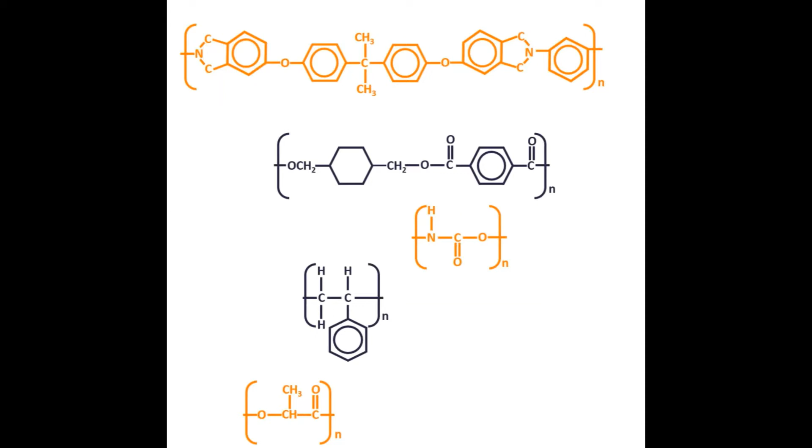The title of this lecture is Polymer Matrix Composites: More Than Just Strength Improvement. The reason I titled it this way is because we're going to look at other applications we would make composites for. And when most people think of composites, they think of strength improvement, and with good reason.

If we go back to the earliest use of composites, we need to ask ourselves: what is the first documented use of composites? If you look at the Bible, Exodus 5:7, the Pharaoh tells his people to no longer supply the Israelites with straw for making bricks. Let them go and gather their own straw. This was after Moses came in and said, let my people go. This was punishment on the Israelite slaves, imposed by the Pharaoh.

Now it's very interesting because they're talking about straw for making bricks, and the straw was actually used as a reinforcement. So no matter your religious belief, the Bible is still a written document, and it was written over 3,000 years ago. So over 3,000 years ago, people were making fiber reinforced composites.

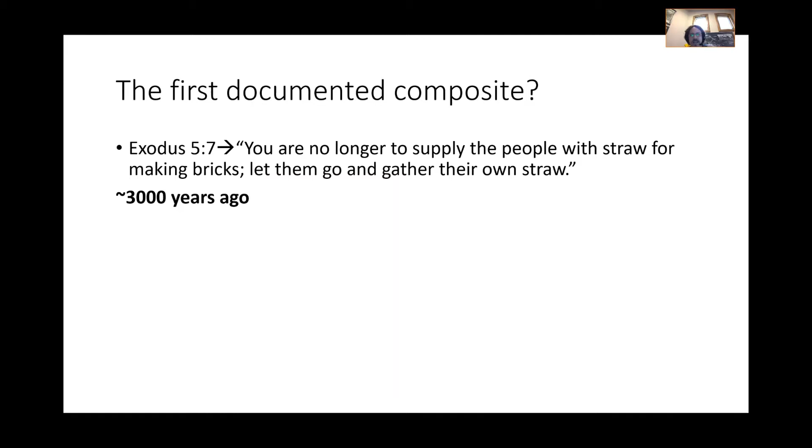You may think it's old technology, but if you look at this paper, people are still doing research on reinforcing bricks using straw as a fiber reinforcement. This paper was published in 2017, which isn't that long ago.

From the get-go, composites were made more as a strengthening type of application, and the earliest case is strengthening of bricks. You can go into other strengthening mechanisms for bricks. You always hear that the Greeks sun-baked their bricks and the Romans oven-baked their bricks, but that's more manipulating the matrix. Reinforcing with straw would be making a composite, where the matrix is clay.

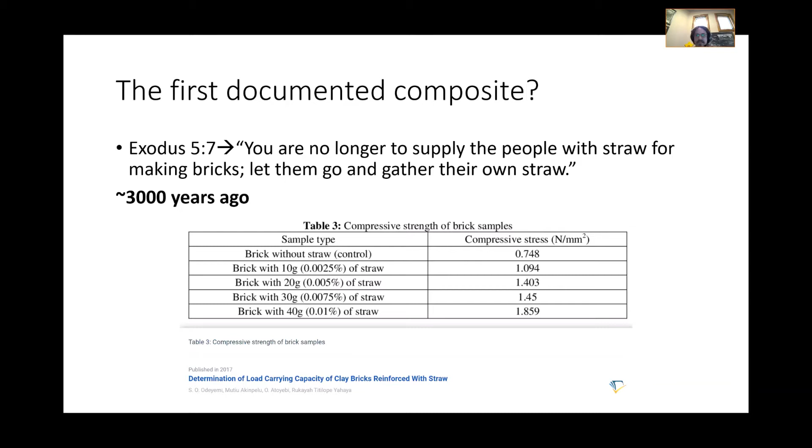If you look at straw reinforced bricks, it's pretty much the same thing as adobe. If you look at this building here, near my home, it's an adobe building with stucco on it, kind of a veneer, and it's flaked off so you can see the adobe bricks. Straw reinforced bricks is what we see in adobe.

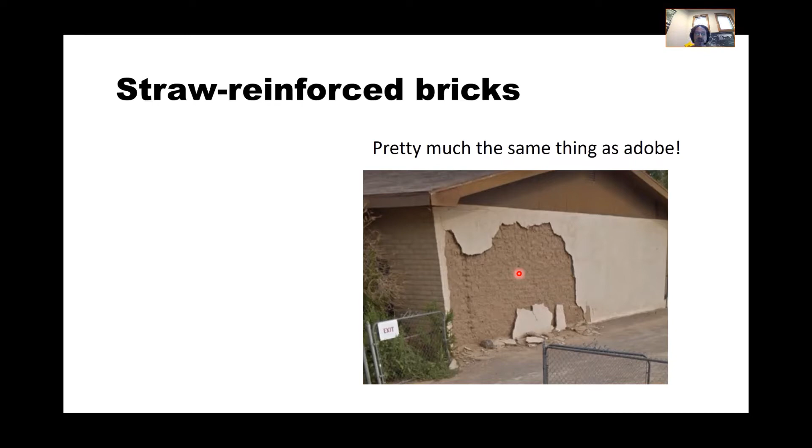Adobe's been used in the Southwest for centuries by the native, indigenous cultures. This is my hand, but I'm holding a brick my child made, having done an experiment making her own adobe bricks. If you look closely, you can see it's essentially a plant fiber reinforced ceramic matrix composite. What a mouthful.

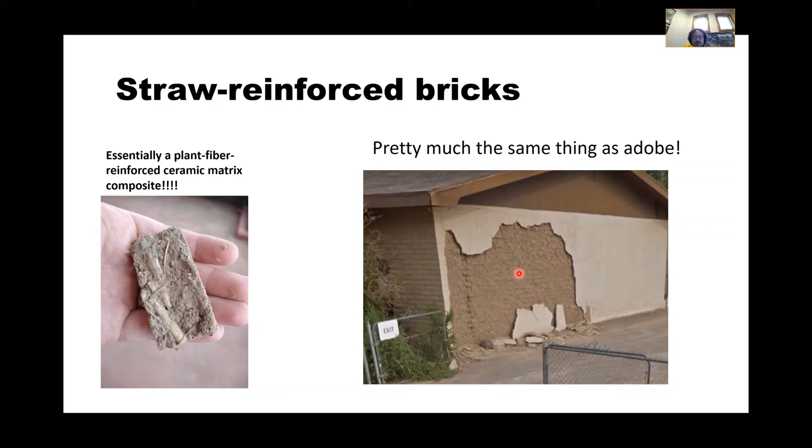That's kind of a segue into what we're going to be talking about today. We're going to talk a bit about plant fiber reinforced composites, research done here in MME, Metallurgical and Materials Engineering, in my lab, the Polymer Extrusion Lab. I titled the presentation 'More Than Just Strength,' and we'll get there, although the first few examples deal more with strength reinforcement. Hopefully this is a different point of view for you, and it enriches the viewpoint you all will have in terms of composites compared with laminate composites.

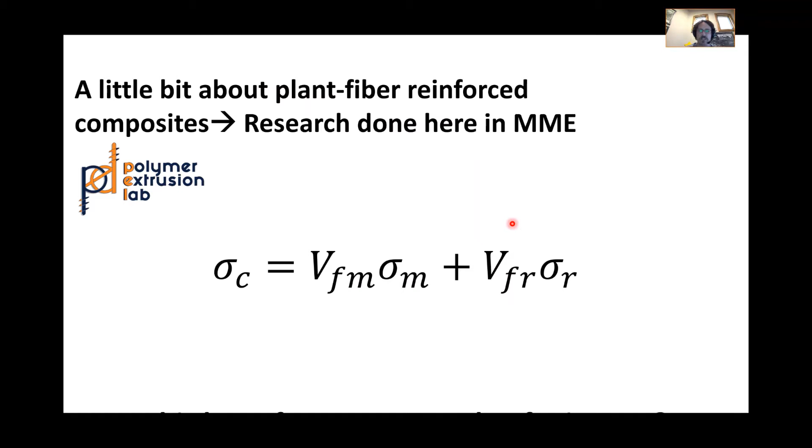A lot of the design for composites is geared around this simple equation: the yield strength of your composite equals the volume fraction of your matrix times the yield strength of your matrix, plus the volume fraction of your reinforcing agent times the yield strength of your reinforcing agent. Not too terribly hard of an equation. You want to think about whether it's a law of averages or a rule of mixtures — two equation types we talk about when we make a final product out of two or more constituents.

Additive manufacturing of composite materials — something I've been doing for a long time, and it's quite interesting.

If we take a look at this equation here, we're saying the yield strength — think of a tensile test where you're pulling, and you want those fibers to be oriented in the same direction as your applied stress.

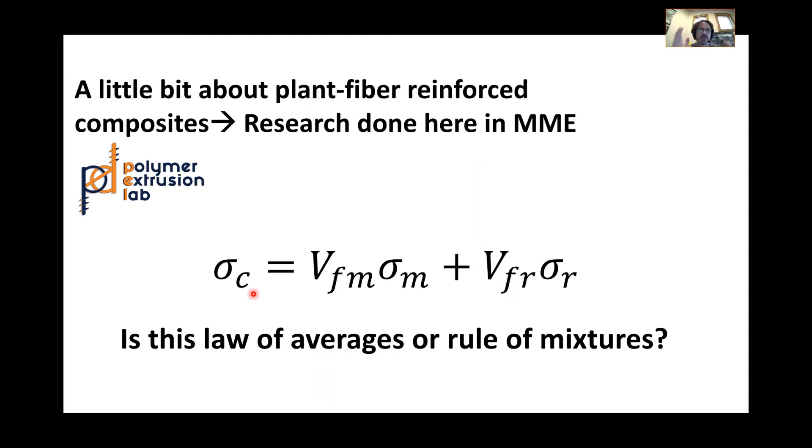What's actually kind of cool with additive manufacturing, and I'm talking about fused filament fabrication additive manufacturing, let me get this slide out of the way.

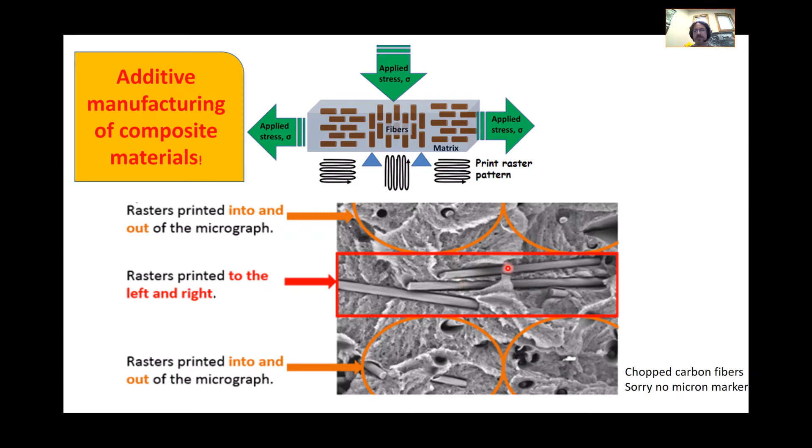The matrix material we're going to talk about first in some work - we're talking a little bit about plant fiber reinforced composites we did here. The first matrix material I'm going to talk about is polylactic acid, PLA. It's not the best material, but there are some advantages to using it.

It's sustainable, sourced from sugar sources - corn, mainly in the US, we grow a lot of corn. Beets and sugarcane are primarily used in Asian nations, where they grow a lot more of that kind of crop. It's biodegradable, so sustainable, which is a big deal. You don't use petroleum resources - it's sourced from renewable resources, and it's also biodegradable.

The drawback is it's not exactly an engineering plastic. So the primary application for PLA is actually food products. It is used in several biomaterial applications like stitches, and it also has shape memory properties, which makes it good for stitching. You can stitch a wound very loosely, apply some heat, and then it draws the edges of the wound together. It's kind of interesting.

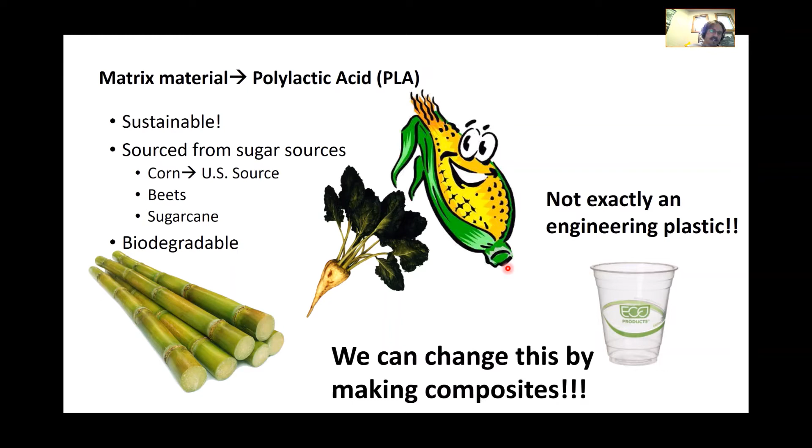But we can change the fact that it's not exactly an engineering plastic by making composites. The filler material we used at first was jute plant fiber - again, jute, a kind of renewable resource.

I'm going to pose this question to you: if I make a composite that is 2% by volume jute plant fiber and the balance PLA, what is the theoretical yield strength of this composite? Ask yourself this question - you might see something similar later.

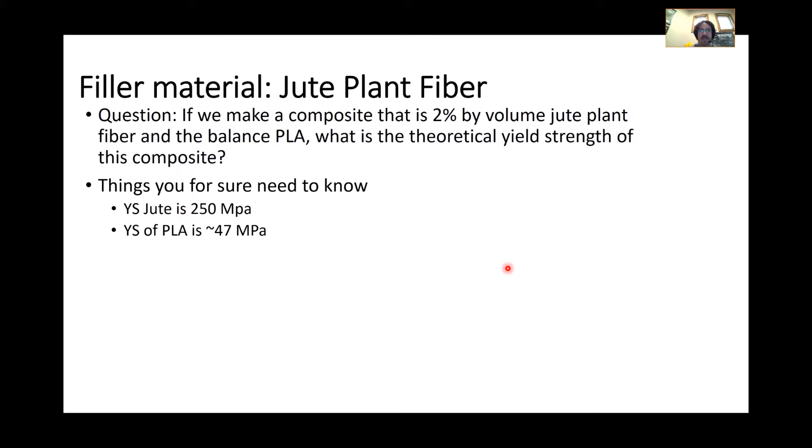Things you need to know: you for sure need to know the yield strength of jute, which is 250 megapascals - forgive my small a, I see that error a lot. And the yield strength of PLA is roughly 47 megapascals, depending on molecular weight and other things like that, but let's just go with 47. You will have to assume now that the interface between the matrix and the filler is robust.

And that's a big assumption, because if you recall the micrograph on chopped carbon fiber in the polymer matrix, you saw there was some pull out. Glass fiber reinforced composites were probably one of the first things society saw in terms of a polymer matrix composite, and the first thing that happened was the glass fibers pulled out. It was Owens Corning who developed some of these procedures to improve the fiber matrix interface.

So right now we're assuming the interface between the matrix and filler is robust. We're also going to assume that the fibers are oriented parallel to the direction of applied stress, and we're going to use this equation we saw before: the yield strength of our composite related to the volume fraction and yield strength of the matrix, and the volume fraction and yield strength of the reinforcement.

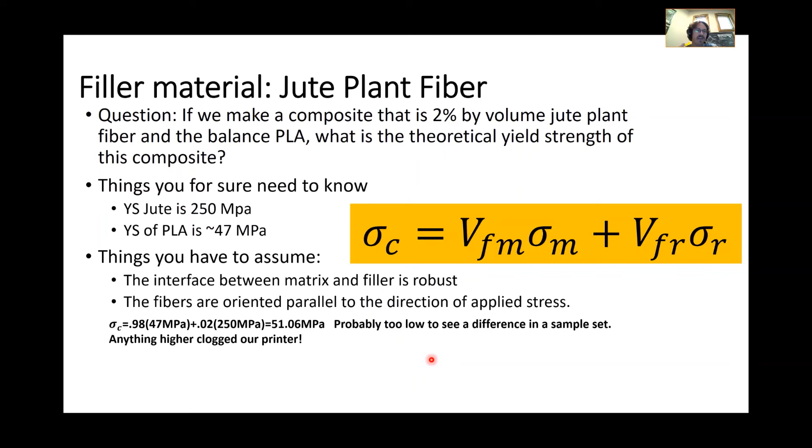Okay, so let's start talking about considerations we want to make when we're making composites. And one of them is the limitations imposed on your materials by the manufacturing process.

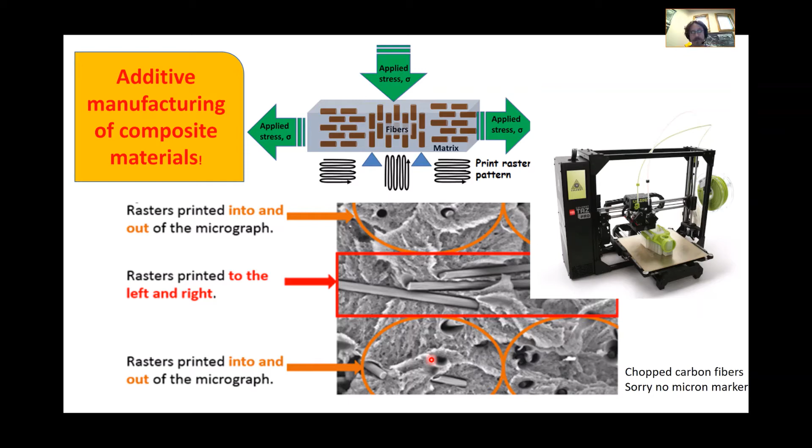I think a lot of people are familiar with FDM: you're squeezing molten plastic through a very small orifice, usually less than 1 millimeter in diameter, sometimes 0.1 millimeters. So if you have stuff that's going to clog it, you're going to have some troubles. That's one thing to consider, the manufacturing process.

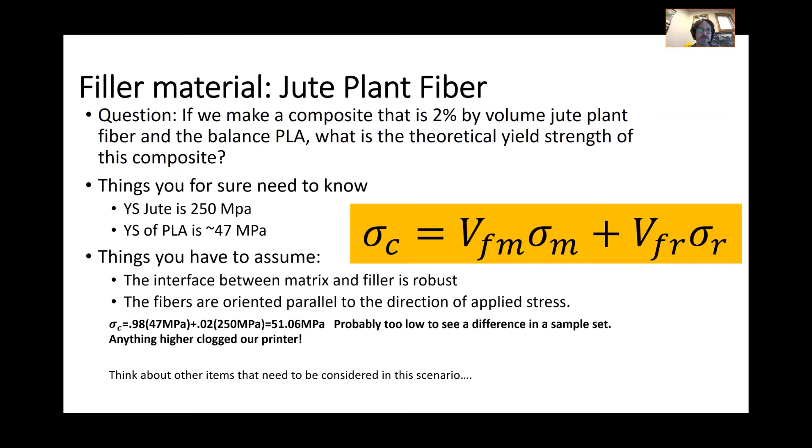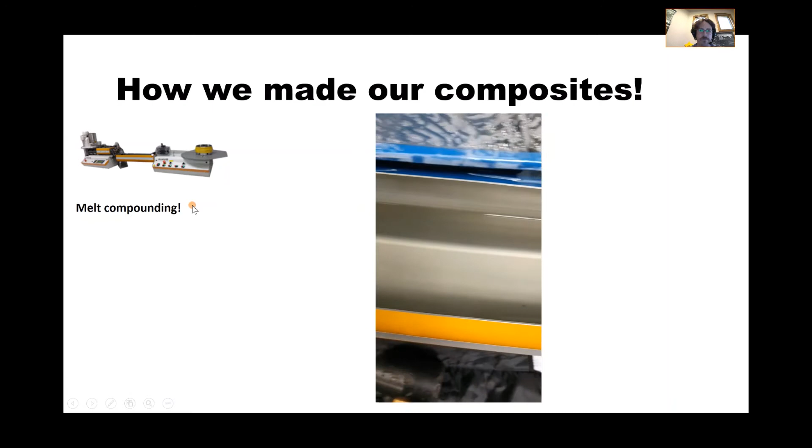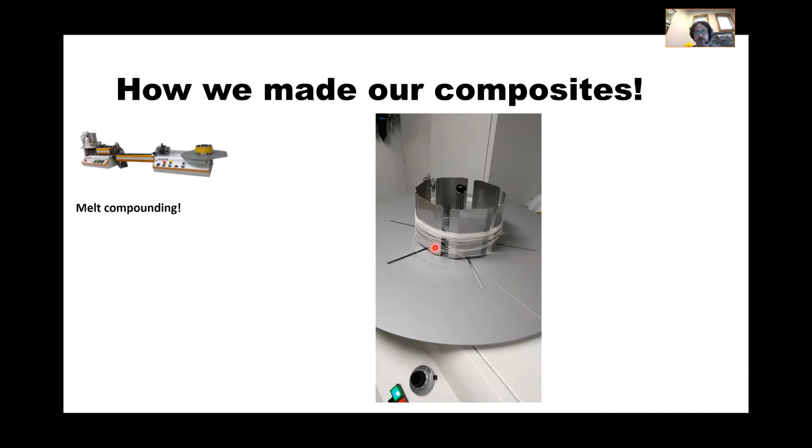You feed your material here, it goes through the extruder, we cool it off, and we wind it, so we have a filament that's ready for our 3D printer platform. We can go direct from melts to filament, and we can also chop it up later and make different types of material systems. You feed your material through a hopper, it melts, goes through some sort of cooling, sometimes water, sometimes air, sometimes both. This is called a belt puller to try to maintain the diameter, and we have other components too that help us with diameter control. Then we wind it. That's how we've made pretty much every composite in this talk, using this extruder or another.

Basically, we have other kinds of smaller types as well.

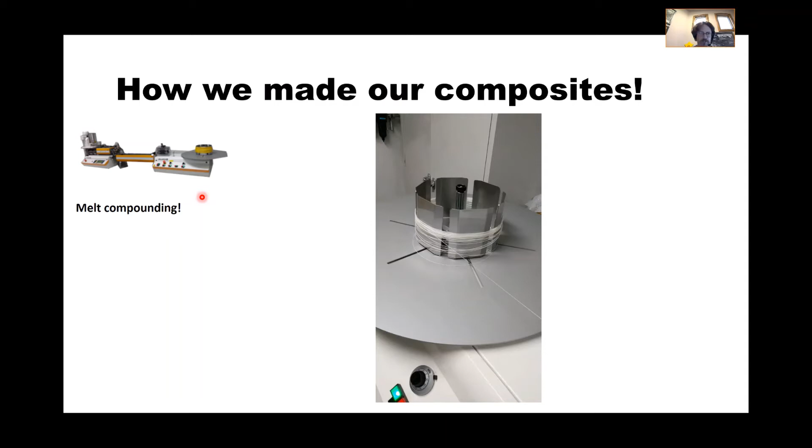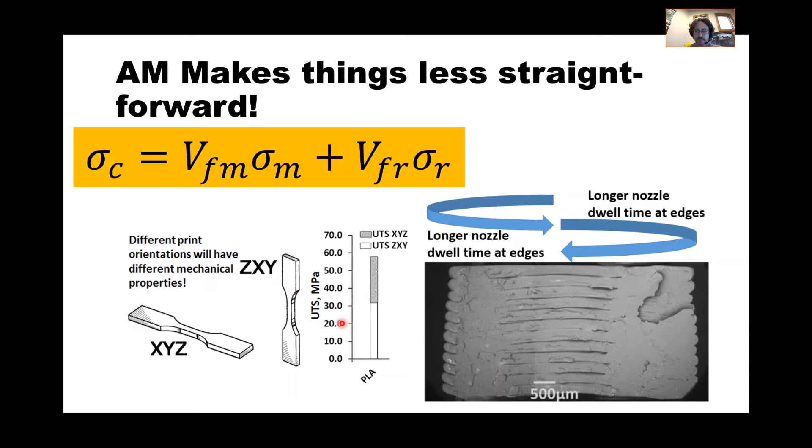Other materials used in this effort include salt and palygorskite organo-nanoclay. Organo-nanoclays have been used pretty extensively for polymer strengthening and making composites. Montmorillonite is another one used in literature, shown to halt creep. I got into palygorskite because UTEP used to have a company called Mayan Pigments, and palygorskite is what's responsible for Maya blue, so I had some interest in it and thought it was kind of cool. We actually used two different colors of organo-nanoclay in this work, and I'll show you.

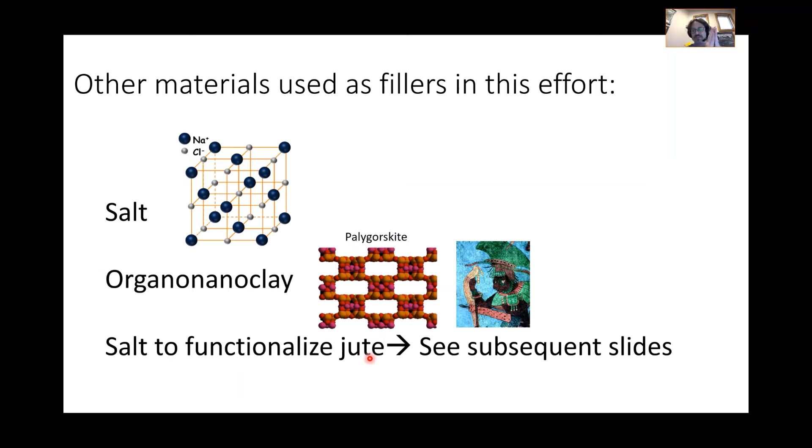By salt, I mean regular old NaCl. We used reagent grade, didn't get it from the dinner table. That was kind of an interesting thing, and we'll see the results. We also used salt to functionalize jute, so we'll see some of that on the subsequent slides. Functionalizing is when you alter your filler material to essentially make it stick to the matrix, or make it more compatible with the matrix. You want to make that matrix-filler interface very robust.

Here's some scanning electron micrographs, or SEM micrographs, of some of this stuff. PLA printed very well on its own. If I were to do some failure analysis, I'd say this is a brittle fracture mode. We don't see that much evidence of plastic deformation. There's evidence of craze cracking, which is the primary failure mode. Anytime you take a piece of plastic and bend it and start seeing some white, that's called strain whitening, and that's a bunch of craze cracks forming.

If we look closely at the PLA jute composite, we see that it didn't stick very well, and we also have fiber pull out. With the jute fiber added, we see a little bit more plastic deformation, even though this is a different magnification. We see some plastic deformation and even some voids, so maybe this fiber was outgassing and causing problems.

When we look at salt, we see that the fracture surface again is pretty brittle, but the salt seems to have stuck pretty well to our polylactic acid, which is a type of polyester.

And we have SEM of one of the Mayan pigments. MayaCrom is the company, crom like chromatic. So PLA MayaCrom Blue, we added about 2% by weight, I didn't add that little detail. We see a little bit more plastic deformation on the fracture surface, so it did something to the surface, but if you look closely, there are a lot of voids, and in the voids are probably the MayaCrom particles. That means they actually concentrated the stress, and we see these circular things called strain fields that manifested around them.

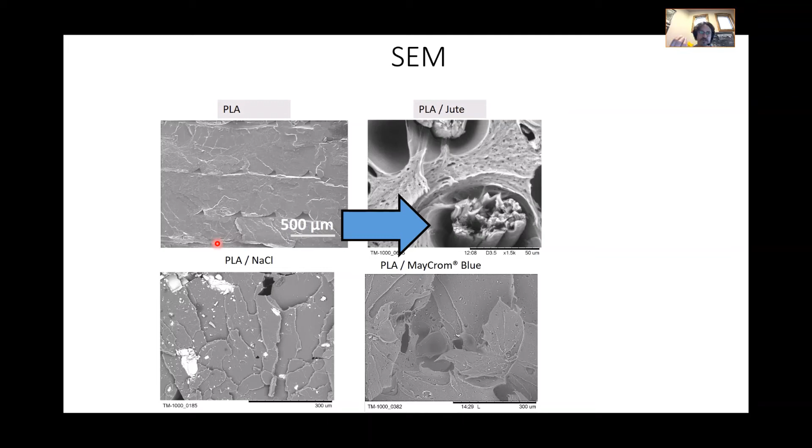So looking at the micrographs, I wouldn't expect the MayaCrom to have had that much of a profound effect on the strength in a positive way anyway, and maybe even the jute probably didn't do that much for us either. This arrow again, just in case I'd forgotten to mention, points to fiber pull out, not a very good interface. Pay attention to that, learn to read the micrographs - it's always really good if you don't already know.

Tensile test results: I almost could have predicted that the Maya Blue and the jute fiber lowered the strength, and I kind of did predict it, not just remembering the results. Didn't do that good of a job. I didn't show the SEM for MayaCrom Yellow because I couldn't find it, so I need to do a better job organizing my scientific data. That's a big no-no, let that be a lesson.

But also didn't have much of an effect. We see a slight bump in the mean, which is what this bar tells us, but it's still statistically the same. And the salt also kind of bumped up the mean a little bit compared to our PLA control specimens, but still not statistically significantly different. That's what these circle graphs tell us.

In terms of percent elongation, it was actually kind of interesting. Adding the jute kind of plasticized our material, and so we had a statistically significantly different data set in terms of percent elongation for the jute fiber. It made it more rubbery basically, albeit not that much, but still it was noticeable and statistically significant.

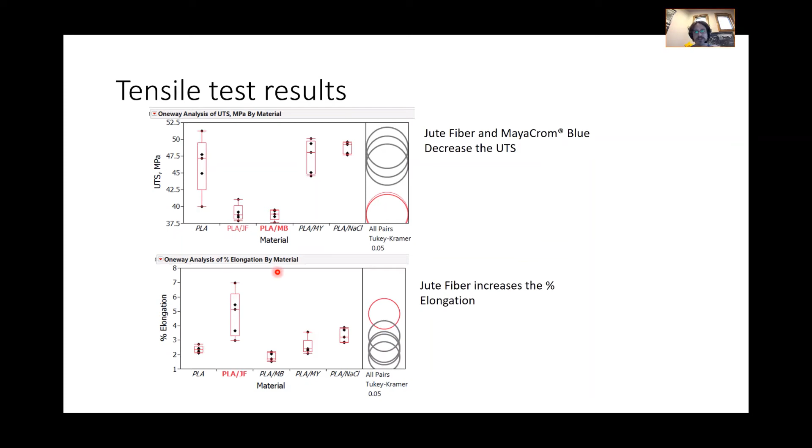Salt started piquing our interest as a research group, and we started looking closer at the micrographs. If we look at this fracture plane, it traverses the interface between the matrix and filler. That tells us there was pretty good interaction between the salt and the PLA. From the point of view of crack propagation, they were the same material, at least in that area. In other areas, salt, which I expect to be fairly brittle, kind of cleaved. But it started getting our interest up.

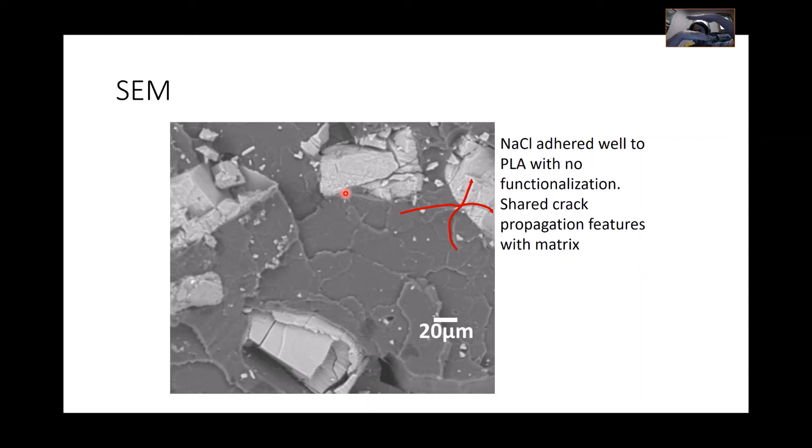So we started looking at other things too, like what it did to anisotropy. The salt adheres to the matrix really well—what if we get salt on the surface and improve the inter-raster interface when we print in the Z? If we look at this, we printed these in the Z, so all our layers are going this way, and these layers alternated X and Y. So some layers were going parallel with the direction of strain, and some were going crosshatch to the direction of strain.

That's what these two data pools mean. T here means it mimicked printing in the Z, and X means we printed it with alternating rasters. We lowered the difference between Z-like printed specimens and ones with a different raster pattern—so we decreased raster pattern sensitivity, basically, by adding salt. That was pretty profound. We made a composite that decreased anisotropy, which is pretty cool, especially in the additive world.

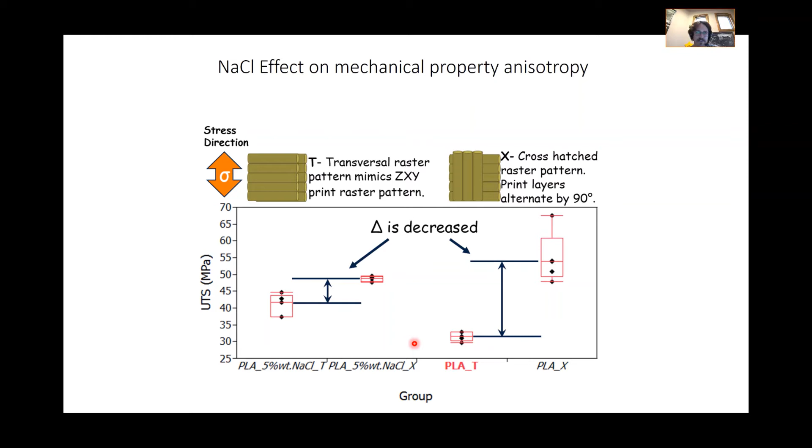We decided to then use it as a functionalizing agent. We noted before that these fibers kind of pulled out and didn't stick very well to the matrix. We could have done a better job separating the individual fibers too, because you see these big agglomerates, but then you have smaller ones. Smaller is generally better when you do this kind of stuff, and it's kind of a paradoxical theory we may touch upon later.

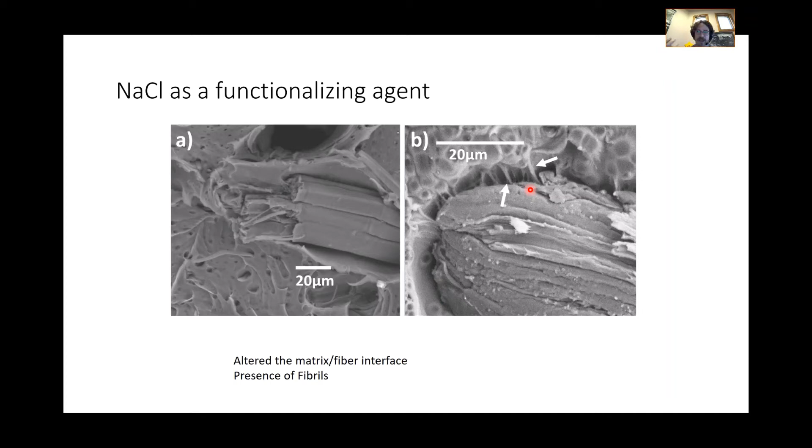When we functionalized it, we noticed this—these are called fibrils. The fiber still pulled out, but the plastic didn't want to give it up. The plastic held on more to the fiber and formed these fibrils between the fiber and the matrix, so we actually improved the matrix-fiber interface. What's interesting, though, is that it didn't really have an effect on the yield strength—statistically the same—but it did remove the plasticizing effect that the jute fiber was having, so we maintained the level of stiffness.

So this may bear further study, but we were able to detect some difference in mechanical properties by altering the interface. However, it didn't manifest in terms of yield strength. So things don't always manifest in yield strength, which is kind of another point of what I'm talking about today.

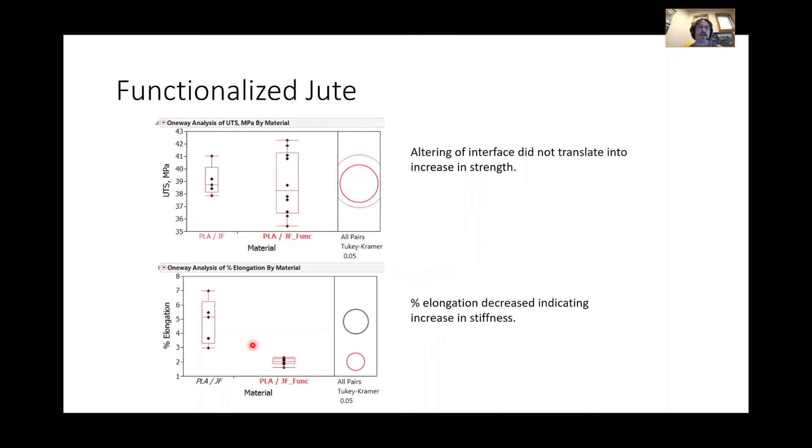For other physical aspects, instead of just using a tensile test, we used a dynamic mechanical analyzer, or DMA. I won't go too deeply into dynamic mechanical analysis in this lecture—I'll probably have a subsequent lecture on that in depth. But basically there are different bending tests you can do, and a whole slew of tests. You can actually do straight-up tensile tests in the DMA—it's a very powerful little instrument.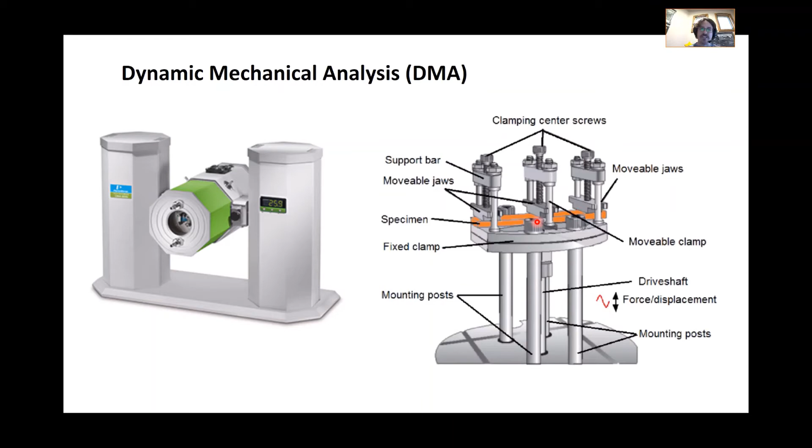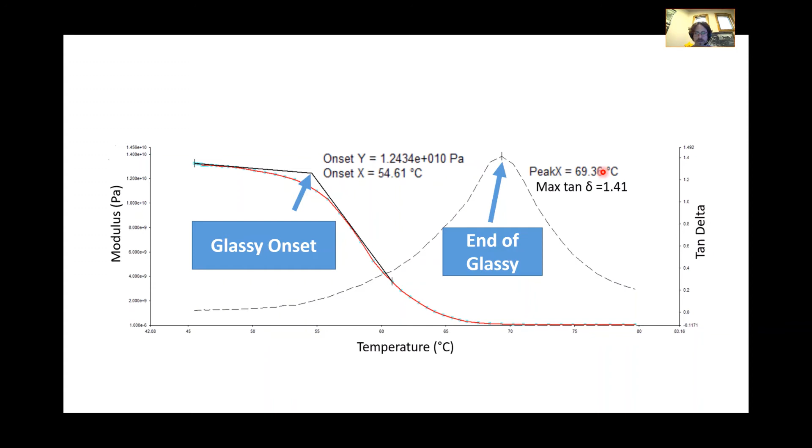The window between glassy onset and the end of glassy is basically the window where your material is going to flow like glass. At the end of glassy, it kind of melts, so it's more like water. That's just a quick overview of DMA.

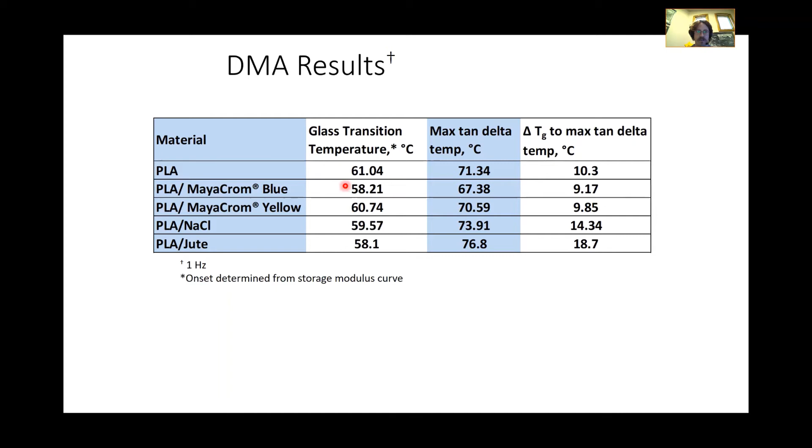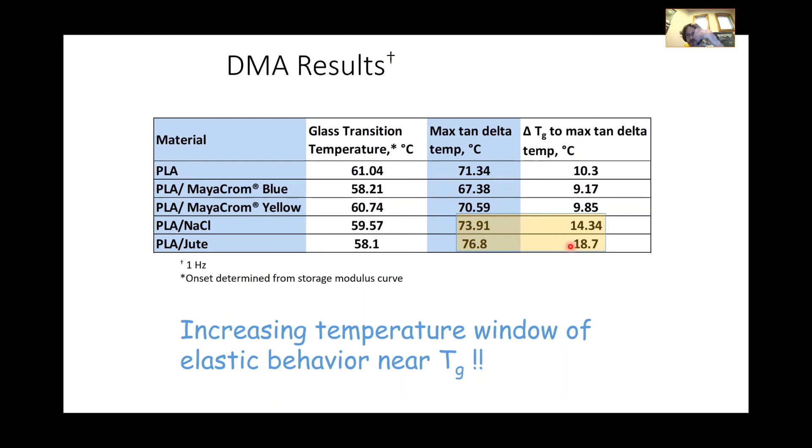So our DMA results: we have PLA, MayaCrom, and salt and jute, and there were slight effects on the glass transition temperature, but it had more profound effects on the window. It changed it, basically increased the window, so it allowed it to suppress melting, is kind of what I'm trying to say.

From the DMA data, we can also tell things. Here, more energy was absorbed by the PLA, so PLA itself is actually a better dampener. What we did by adding this other stuff to it is we made it act more like a spring, so it would store the energy instead of dissipate the energy. Depending on your application, that might actually be a good thing.

The pigments are also altering the rheological behavior, so we see that our viscosity drops when we add the pigment. It drops a lot more for the salt, but everything actually decreased the viscosity. So other things you look at besides mechanical strength - well, it changed the energy dissipating behavior of our material by the stuff we added, some more than others. It's kind of interesting.

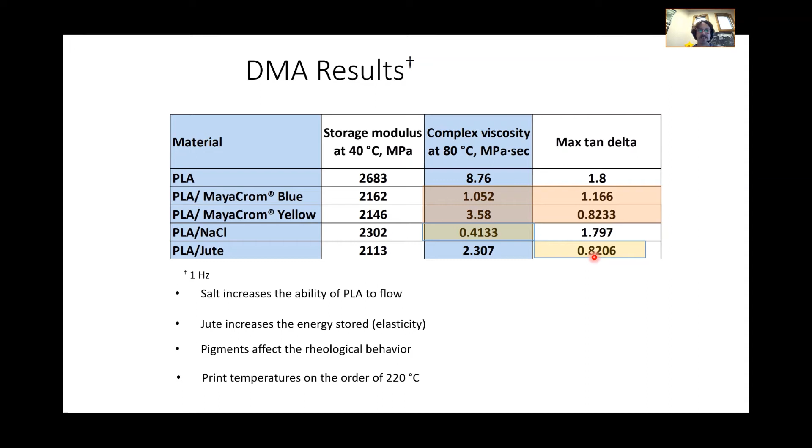It's always good to subject composites to a full gambit of testing, depending on the application, of course. Here's another article I want to talk about - we've not talked about articles just yet - but hybrid metal thermoplastic composites, also for FDM type manufacturing. This is a paper we put out in 2019.

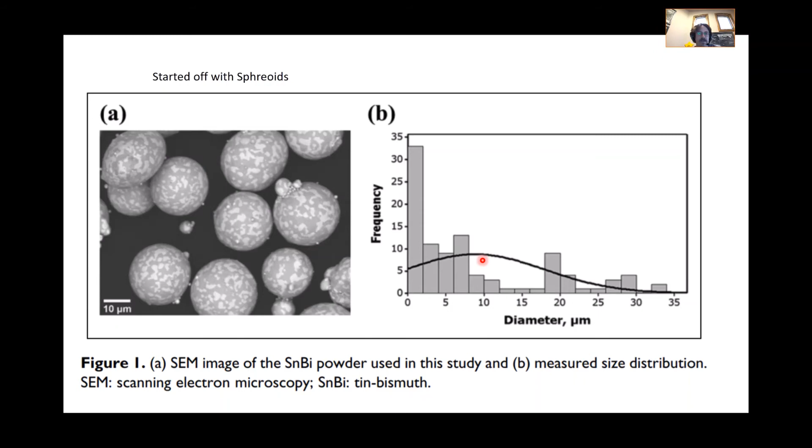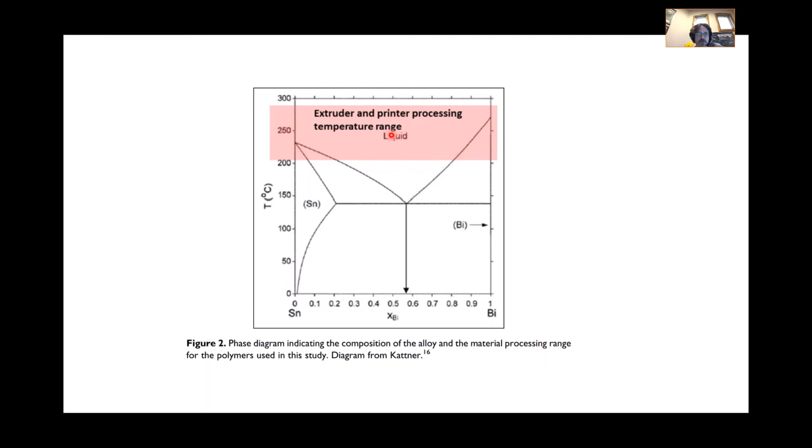We started off with these spheroids, and we used tin bismuth powder, which is basically a solder. They had a nominal diameter of roughly 10 microns, so they were pretty small. We blended that with our trusty extruder. If you look at the phase diagram for the composition of tin bismuth, we used the eutectic tin bismuth. So the range of our extruder and printer processing would liquefy the tin bismuth, so we had the opportunity to change the morphology from a sphere to something else.

We used 3 matrix materials here: ABS, a blend of ABS and SEBS - SEBS is styrene, ethylene, butylene styrene, used a lot in BMX bicycle grips and soles of shoes - we actually used 3 compositions of that blend in the article, I won't go over them all - and our old trusty PLA. ABS is generally what Legos are made out of, acrylonitrile butadiene styrene.

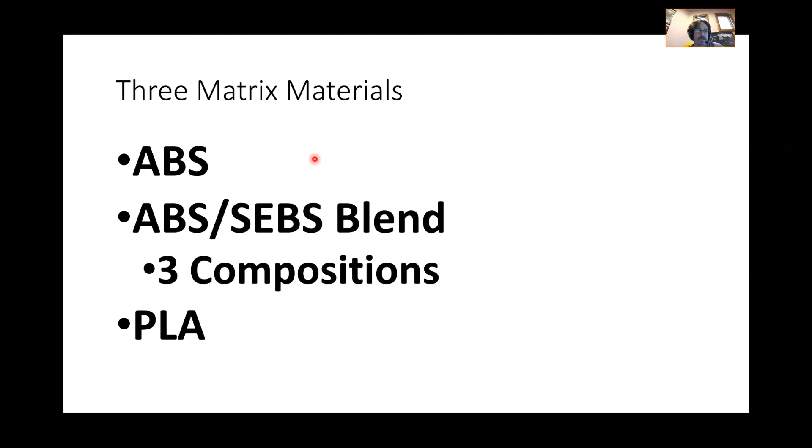So this guy was the standout winner in terms of performance, and again functionalization played a role. What happened? Well, we drew from something spheroid into something kind of wire-like.

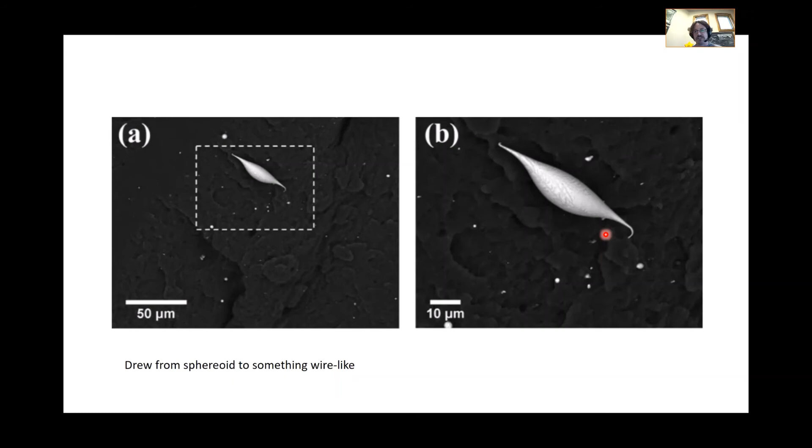If we look at the other compositions, this is one of our ABS-SEBS compositions—sorry for the blurriness of the graph. We noticed something different here. We got wires drawn, and even on the top surface we changed the morphology. So we looked at it crosswise, the transversal section—well, we looked at it this way. I might be getting my terminology wrong.

And if we looked at the other section of the filament, we see that we had wire drawing. So again we drew, but when we compared the sample pools, we saw that the non-functionalized actually was the winner.

So we showed a scenario where functionalization provided the benefit, and here another situation where functionalization does not provide a benefit. And it should be noted, why didn't it have a benefit?

Well, the SEBS has other additives, and it was actually grafted with something called maleic anhydride. Maleic anhydride is a derivative of maleic acid—it's from apples, and it's also found at the bottom of old wine barrels. What it does is make polymers compatible with non-polymers, so you can make it stick to things like metal. Our hypothesis here was that the maleic anhydride graft was somehow compromised by the functionalization process.

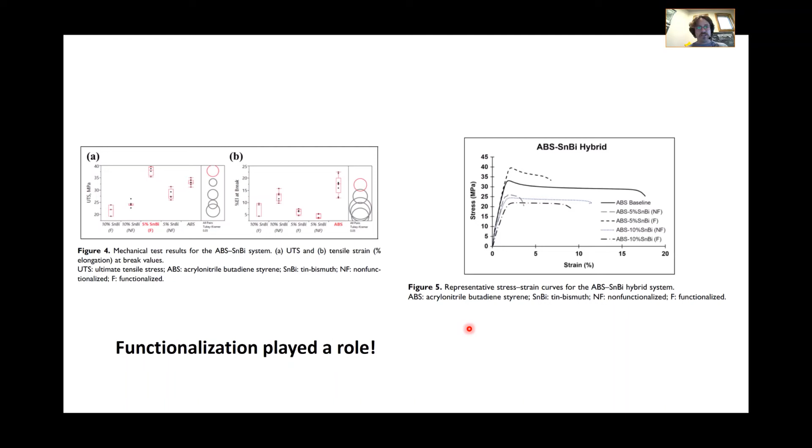So here we see a case where functionalization was beneficial—we saw an increase in UTS. Even though I promised we're not always going to talk about strength, we're still talking about strength. Here I see a situation where the functionalization perhaps was detrimental to what was already there in the matrix. So something else to consider: the chemical compatibility between your filler and matrix, and how you may be altering that as a materials engineer.

I should point out, this was published in a Journal of Thermoplastic Composite Materials, so it's quite fitting.

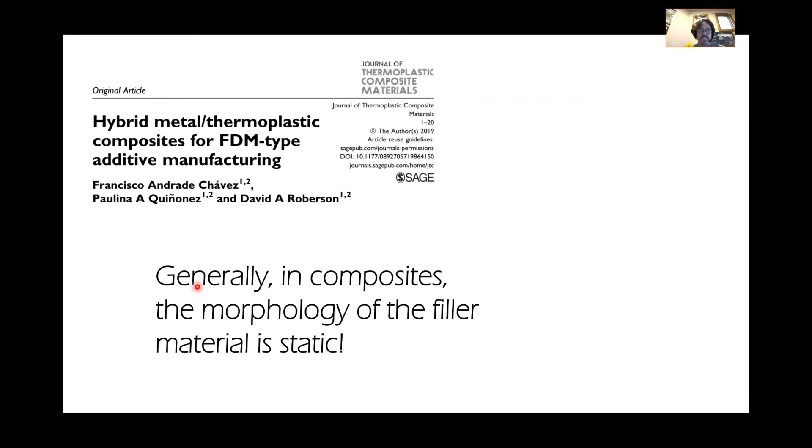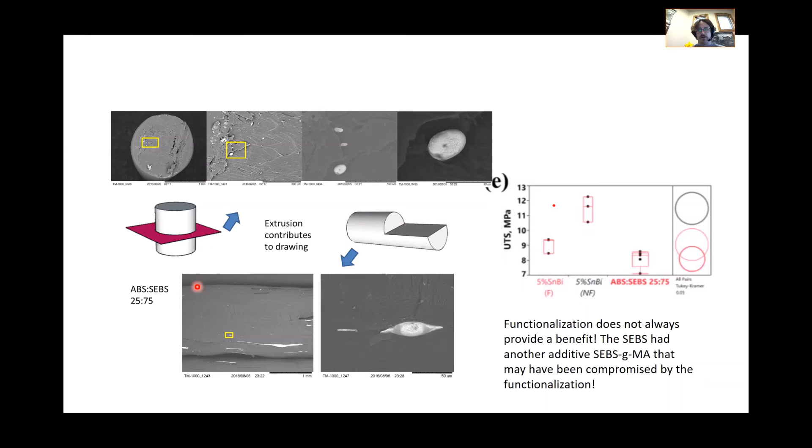The interaction of the matrix material with your filler material, whether it's a sticking thing or changing the morphology of it based on some sort of viscosity thing, are all aspects you have to consider. So it's a very, very complex subject, if you will.

So things to consider when making composites—I was going to put an icon, I'll just put myself. Things to consider when making composites: the manufacturing method of the final product, compatibility between the matrix and filler, and how you can improve the matrix-filler interface. So there are three ways: manipulate the filler, manipulate the matrix, or sometimes both. And sometimes it doesn't work out if you do both strategies.

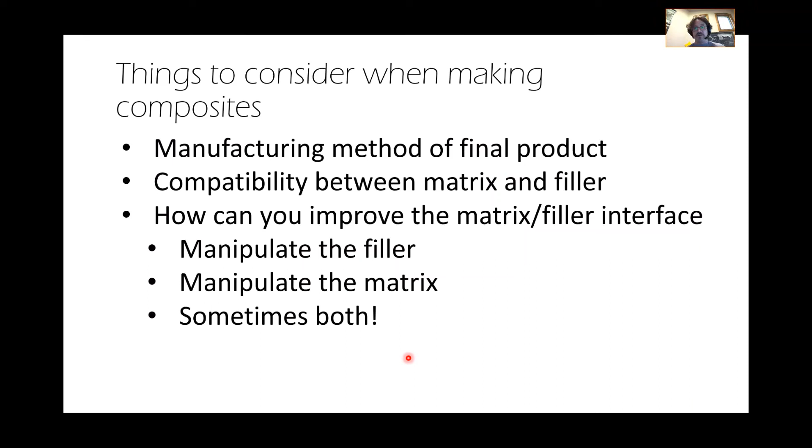All right, so we can make composites to enhance more than physical strength, which was the purpose—oopsie—which was what I wanted to get to when we talked. And I have a video that I'm trying to get to play.

I apologize. There we go—may edit that out.

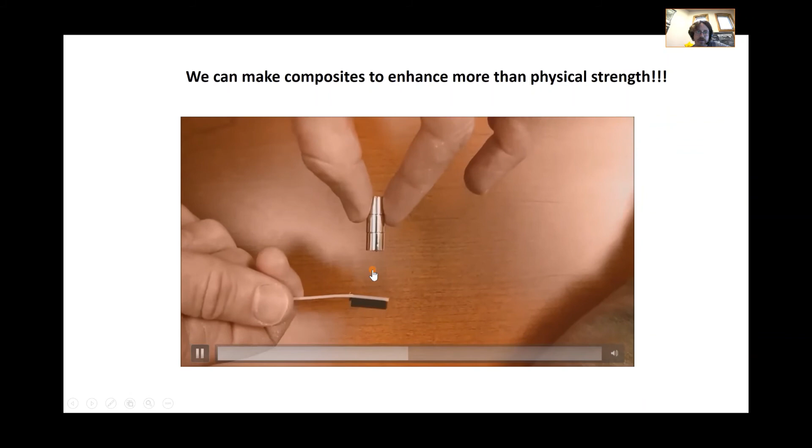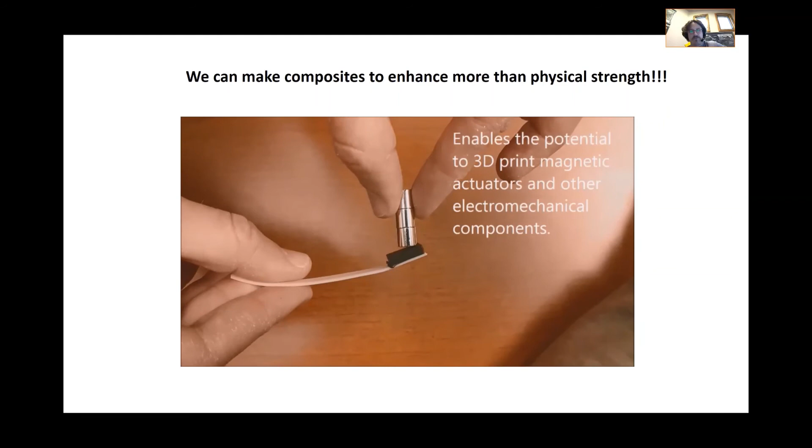So here we've made a ferromagnetic ABS composite. We loaded magnetite into the material to make it respond to a magnet, since ABS on its own is not going to respond to a magnet. We've added something magnetic to it. The beam it's on is one of our rubberized blends, an ABS-SEBS blend, so we're using two not off-the-shelf material systems to make something new. That's what it's all about. This is just a simple example of a composite. We didn't care about physical strength at all, we wanted our polymer to respond to a magnetic field, basically to electromagnetics.

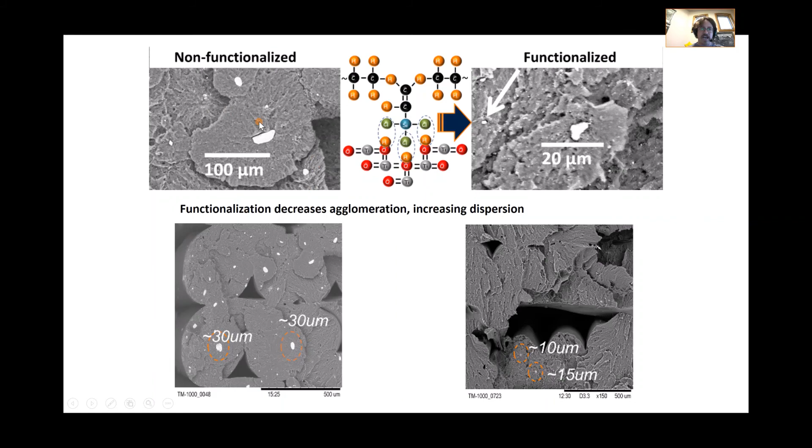So still a little ways to go, but they're actually quite smaller, and this is your particulate size, which is pretty small. If this is 500 nanometers, maybe this is almost nanoparticle size. We did achieve a bump, and we actually got better as time went on. The filling is much higher here than on this micrograph, so we got better at making a high-K material, basically making better insulators.

This graph corresponds with this work, and even with a low loading, probably around 5%, you could do a back-of-envelope calculation, throw this image in ImageJ, compare white to black and remove the air gap. We're close to 50-60% I'd guess just staring at it. Anyway, this graph corresponds with the previous micrograph, so we achieved a bump in our dielectric constant. ABS alone is roughly 3.2, in some cases people have it higher, but this is where we are, this is where we wanted to get. Again, since we're using additive manufacturing it leaves air gaps, which lowers the overall dielectric constant.

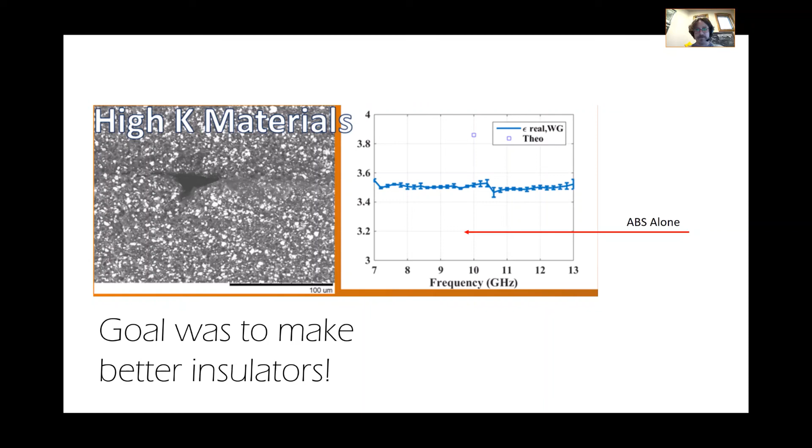So we've seen one application making EM structures or electromagnetic materials by making a polymer matrix composite. Another application was X-ray shielding. Here's an article we put out a few years back where we made 3D printable X-ray shielding, using polycarbonate as a matrix, with some pretty widespread characterization.

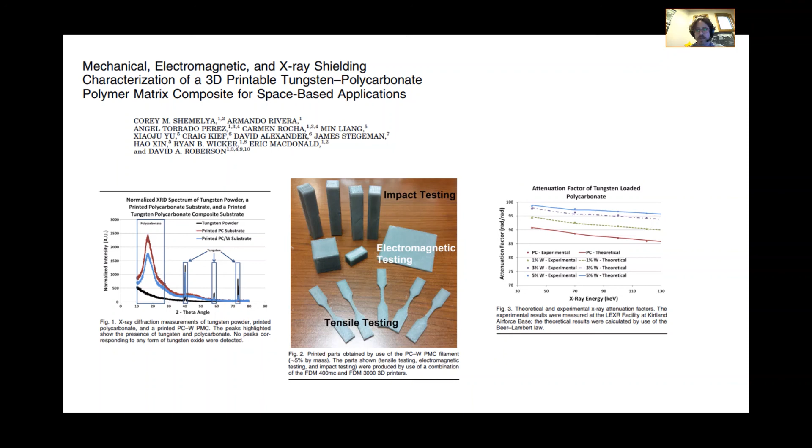We used XRD to make sure we weren't making oxides. Polycarbonate is a semi-crystalline material, so we get somewhat of a peak, although it's broad, not quite an amorphous halo, so we can talk about polymer crystallinity as well. We have our tungsten peaks present in all our scans, showing up in the tungsten powder and in the PC tungsten. We wanted to make sure we weren't making tungsten oxide, because that would have a different X-ray shielding property, and the X-ray shield properties are tabulated.

So you use Beer-Lambert law, which we also see in Intro to Engineering and in structural characterization. The transmitted X-rays equal I naught, basically the intensity of your incoming beam, times e to the negative mu over rho, which is the mass absorption coefficient, times the density of your material.

Density will cancel out, but tabulated values of mass absorption coefficient are always given as mu over rho. So by convention you always have to have something to cancel it out, times x, which is the thickness of your material. You can calculate a new mu over rho for your composite using the weight fraction.

So this is mass fraction of component 1 and mass fraction of component 2. I'll give the answer for the other question here: is this a law of averages or rule of mixtures type of equation?

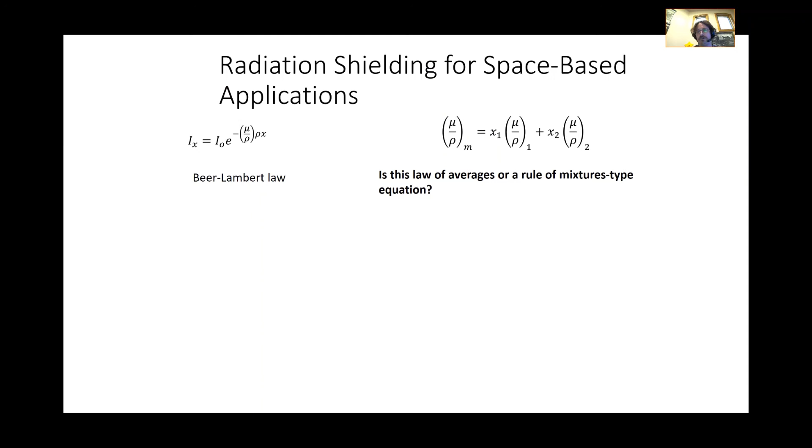If it's weight percent, it's law of averages. So this is weight percent. The previous equation we saw earlier, our composite's equation, uses volume fraction, so that's rule of mixtures. So if you didn't already know it, that's the difference between law of averages and rule of mixtures.

Here's some results. We have our straight-up polycarbonate, which was white in color. When we add 1% by weight tungsten, it starts getting darker, and we were only able to go all the way up to 5%. We tried to save our processing equipment, since tungsten's very hard and we didn't want to eat the inside of our extruder, so we didn't go that high. But you see polycarbonate on its own already blocks out X-rays pretty well, which is kind of interesting.

So if you're in a pinch and you have a lot of polycarbonate and you want to shield yourself from some X-rays, you'll actually do a pretty good job.

Adding 1% by weight tungsten decreased it pretty significantly, then 3% and then 5%. With the error bar, we're at about 3% transmitted X-rays. So we made a composite, didn't necessarily care about strength, we cared about X-ray shielding. These were the results.

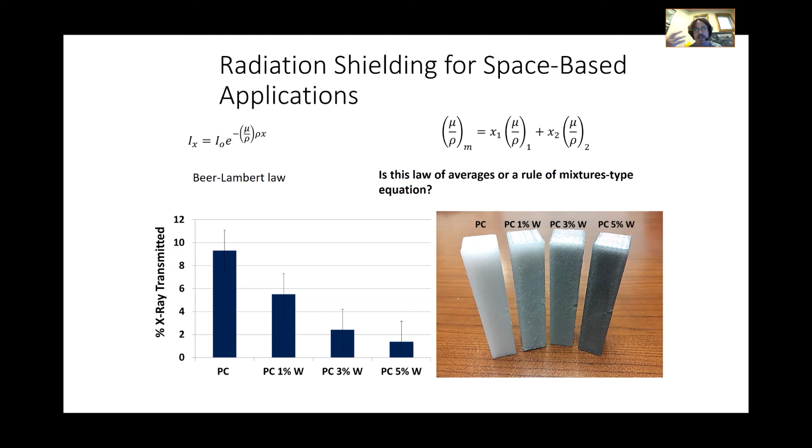Again, kind of similar to how we saw with those carbon fibers, we see a difference in morphology when printing left to right versus printing in and out of the screen. So we were aligning the material, and that's why the heat transferred in a different way.

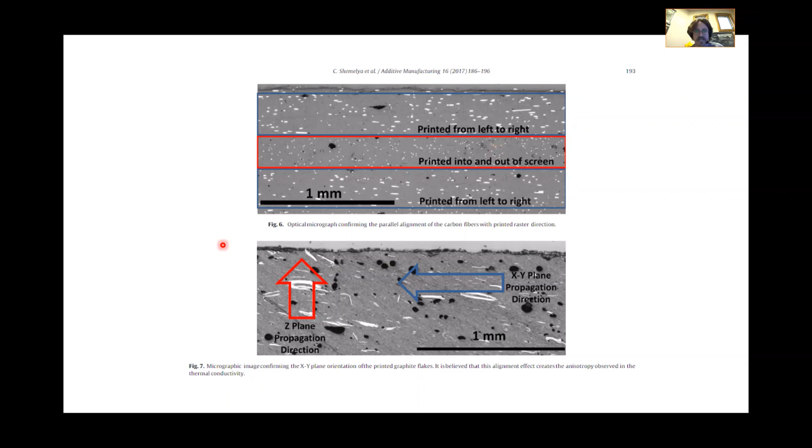So another application of polymer matrix composites, particularly for additive manufacturing - you could conceivably create pipes for thermal dissipation this way, just by controlling the raster pattern of your composite.

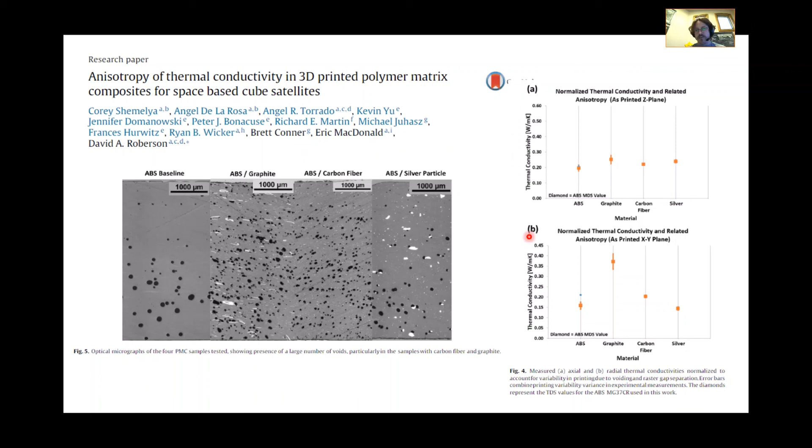So in summary, here are points of view to consider when you're making polymer matrix composites. From the matrix side: manufacturing constraints, chemical compatibility, and can you have mechanical bonding? That probably goes more into the filler, you can look at it either way. Filler morphology, compatibility with the matrix, and the effect on overall physical properties.

How much is enough? How much is too much? If you saw with those tin bismuth experiments, 10% by weight was too much, but 5% was pretty much Goldilocks - it actually improved the strength.

Hopefully you guys have enjoyed this overview of thermoplastic composites, and considered things other than strength that you can manipulate by making a composite, which is kind of the point. Also, hopefully you thought of some things from an engineering point of view to consider if you get into the business of making composites. If you have any questions at all, always feel free to ask.